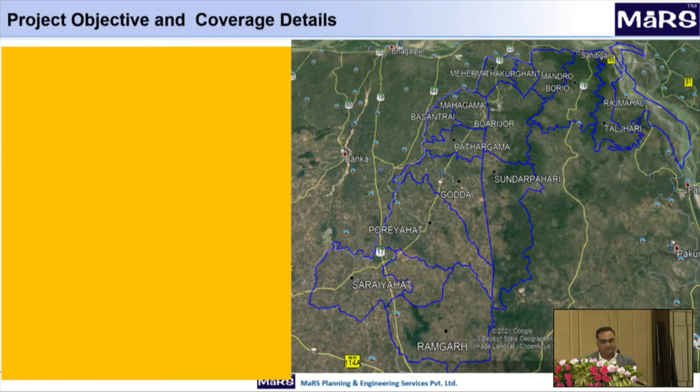The objective of the project is to provide 100% sustainable drinking water pipes for water supply within 9 blocks of Godda. We will be covering the whole Godda district, 3 blocks of Sahibganj, and 2 blocks of Dumka using river Ganga as a source at Rajmahal.

The present water supply is intermittent and unreliable, and it is using groundwater, and most of the households are using dug wells, hand pumps, which is not reliable. So this project was formulated to address these gaps in the water infrastructure in a holistic and integrated manner. And the main objective of the Drinking Water and Sanitation Division is to improve the water supply efficiency and have a positive impact on the public health and environment.

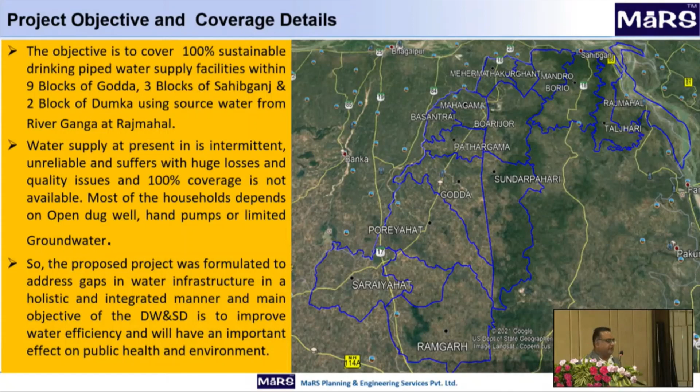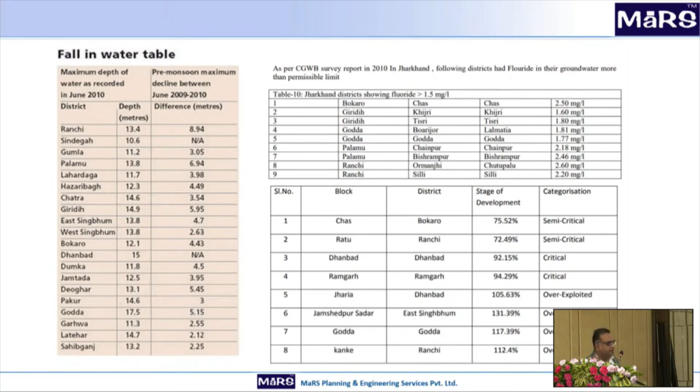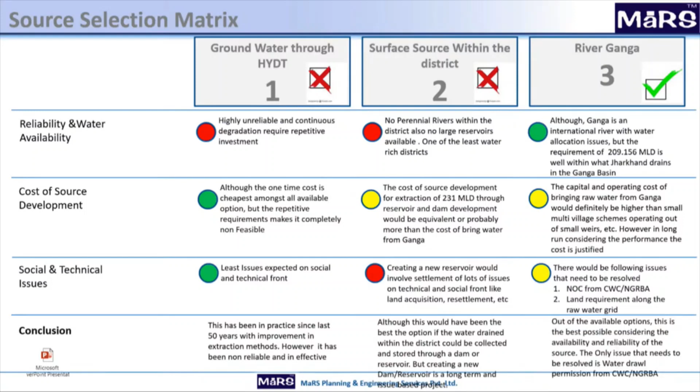So this is the selection matrix. Groundwater was highly unreliable, and there are no perennial rivers. And although individual wells and dug wells would have been cheapest, it's not a viable option. And also the cost of source development for extraction of around 231 MLD through reservoir and dam would have been

very costly. And there are other social and technical issues for the groundwater and creating new reservoirs. Hence, Ganga was a viable source and a sustainable source for water supply, which we have selected as a source for this mega water supply scheme.

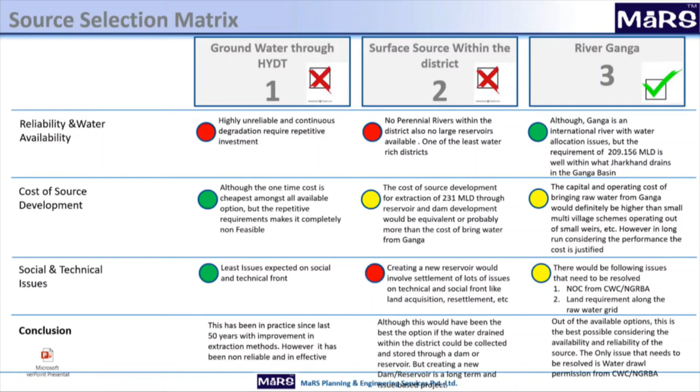We are covering 14 blocks, totaling 271 panchayats. We are covering 3,264 villages and about 3.32 lakh households. This covers almost 6% of the state population, and an area of around 5% of the state, which is around 5,000 square kilometers.

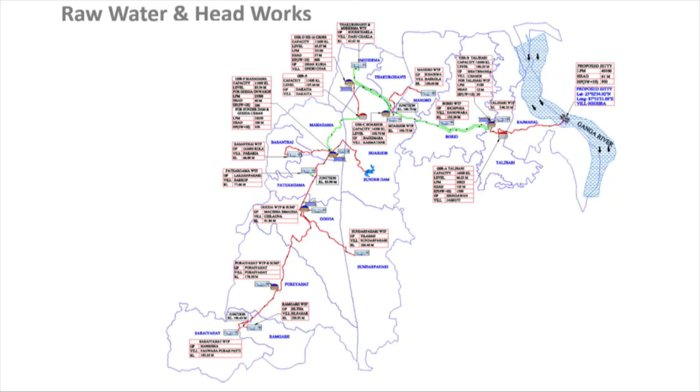So this will flow all the way to Meherma, and from there there's another intermittent pumping, and then ultimately the water is coming to Godda district in Mahagama reservoir. And after that it is all pumping till the downstream sources, till Ramgarh and Saraiyahat. Next.

The scope of work covers construction of a floating jetty at Rajmahal. The raw water transmission main length is 87 kilometers. The pipe diameters are from 1100 to 1800 mm. There are 13 WTPs provided at different locations. There are 6 main GLSRs. There is 1 ESR at each panchayat, a total of 271 elevated service reservoirs.

The clear water rising main length is around 1200 kilometers. The entire distribution network for this project is around 5,500 kilometers. There are 14 electrical substations, and we are going to provide around 3.32 lakh house connections.

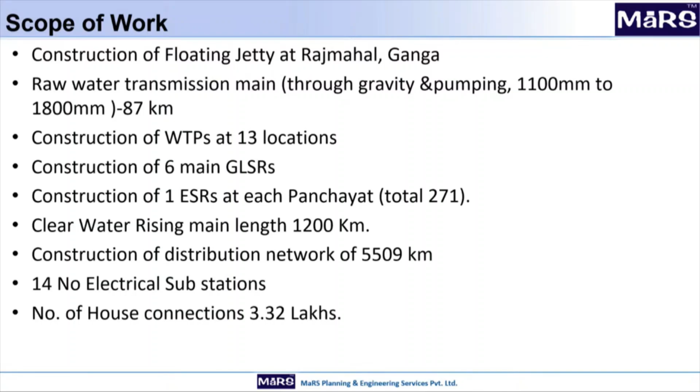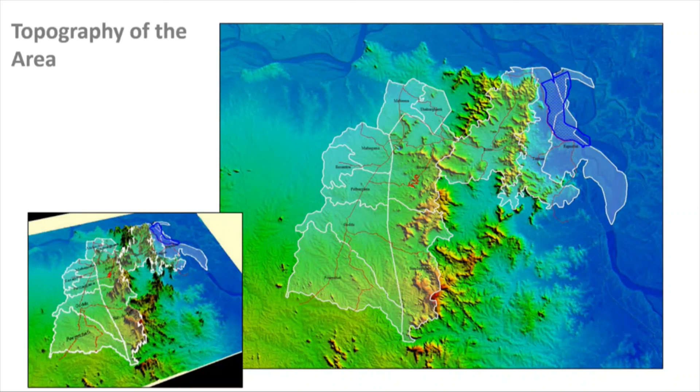Next. This is the topography of the area. The topography is highly challenging. There are undulations at several places, and that is why from Rajmahal, we had to pump water to the Rajmahal hill, which is at an elevation of 190 meters. From there, it flows by gravity downstream, and there's intermittent hilly terrain, as you can see. Because of that, we have intermittent pumping at several locations.

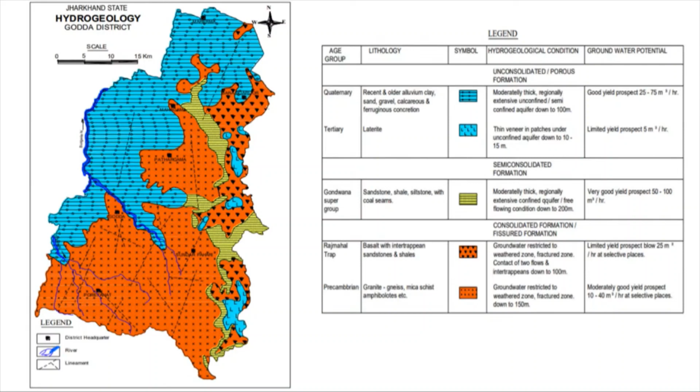Just a minute, Mike.

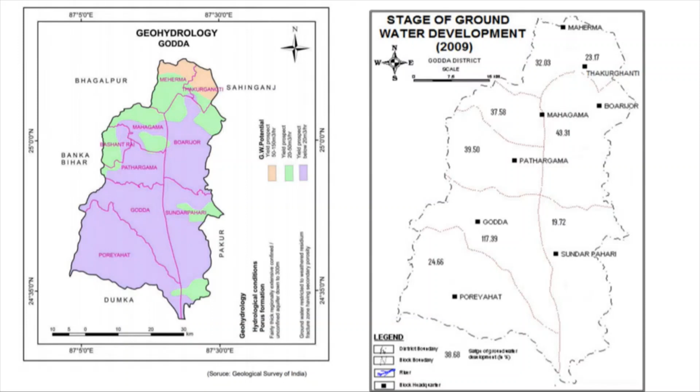So, as you can see here, the yield is around 50 to 150 cubic meter per hour in the orange colored region, and in the southern part till Poreyahat at the downstream end, it is below 20 cubic meter per hour. So groundwater was not a sustainable source.

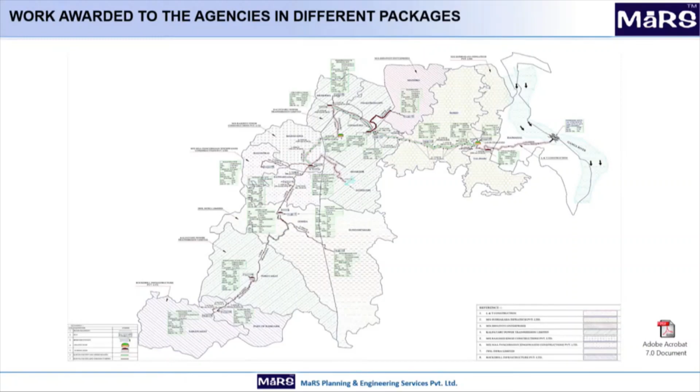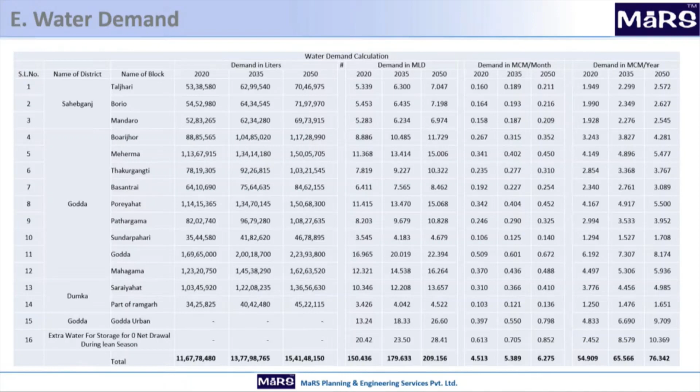So for the project, these are the different activities performed. During the pre-construction stage, there was DPR preparation, then technical sanctions had to be taken, then the bid process was followed. Then we assisted in award of work to agencies and liaising with other departments for paperwork, and put necessary quality assurance, quality control systems in place before the start of execution.

During construction, we are ensuring that the work is carried out as per technical specification and tender drawings, and we are ensuring water quality and work quality are as per the specifications and drawings. We are carrying out material inspection as per QAP and standard QAPs. Then we are monitoring the progress of the project in time, cost, and quality, assisting with the measurement of work and verification, scrutiny of the bills, and regular reporting of the progress.

Also assisting in audits, VIP visits, legal issues, any conflict resolution, and then post-construction, we will ensure that the delivery is as per the plans, as in timing, and also in giving water supply connections to consumers. Then pre-commissioning, commissioning, and tests, making periodic site visits to ensure that work agreed is completed by the contractor. And at the end of the defects correction period, when all outstanding works are completed and all repairs are carried out satisfactorily, to issue the defects correction certificate in accordance with the contract.

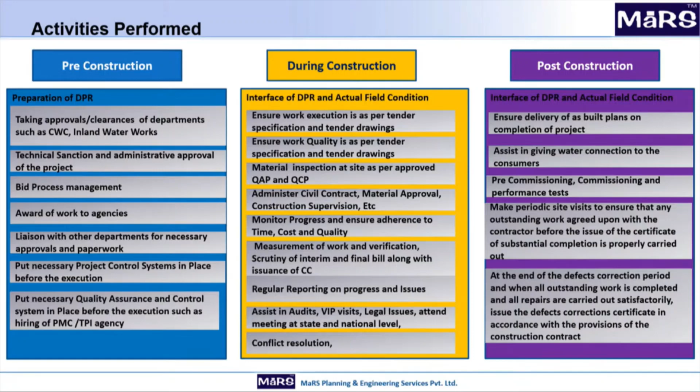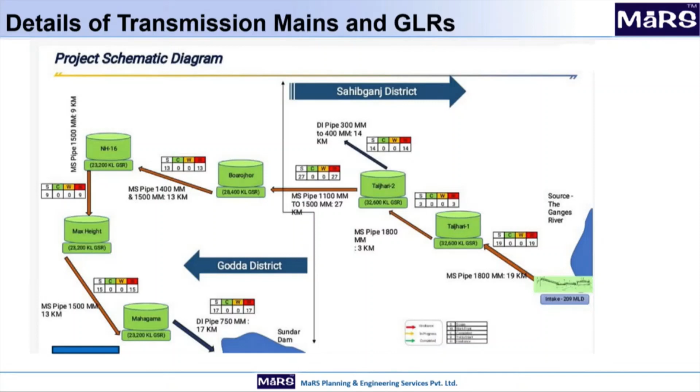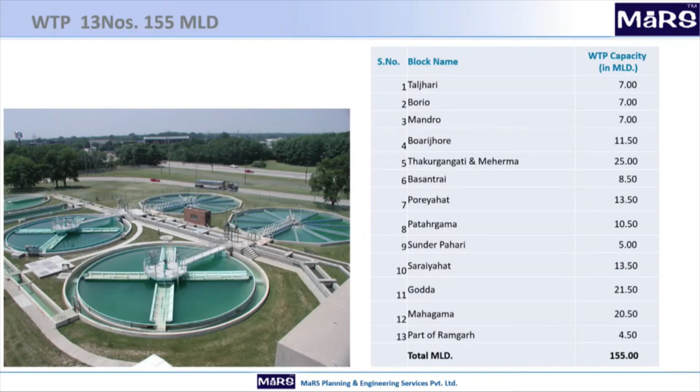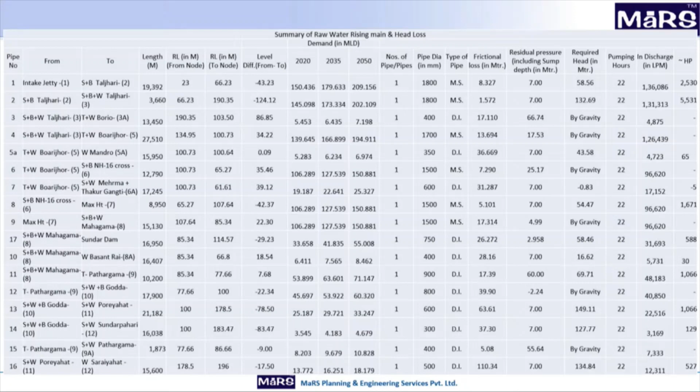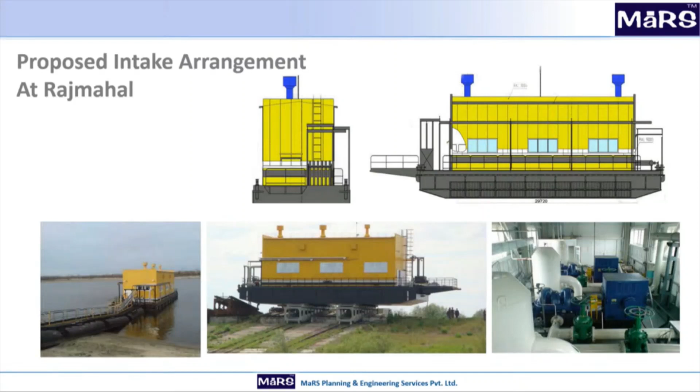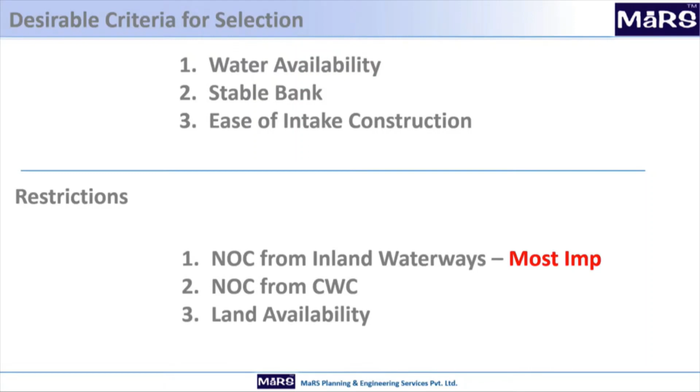These are the 2 floating jetties that we will be having at the intake location. Here, because the river Ganga is also used for navigation by inland waterways, a permanent intake was not feasible at this location, and we could not obtain any permissions for a permanent intake. That is why this floating type of jetty was selected. NOC from Inland Waterways was taken for this, also NOC from Central Water Commission and land availability.

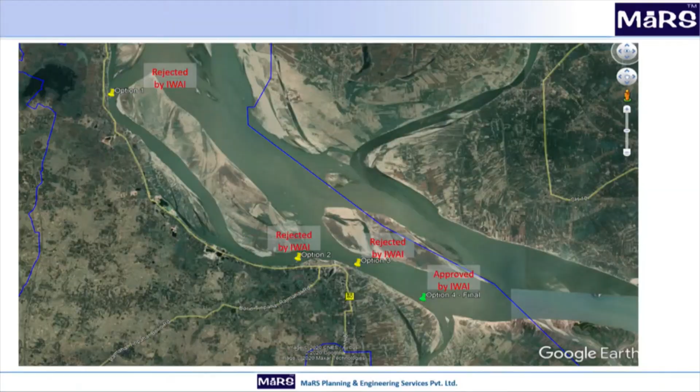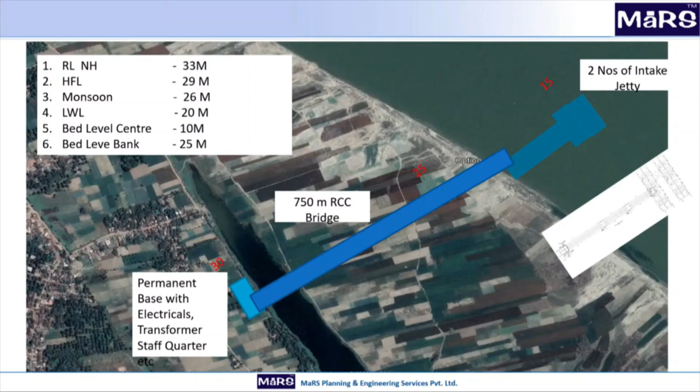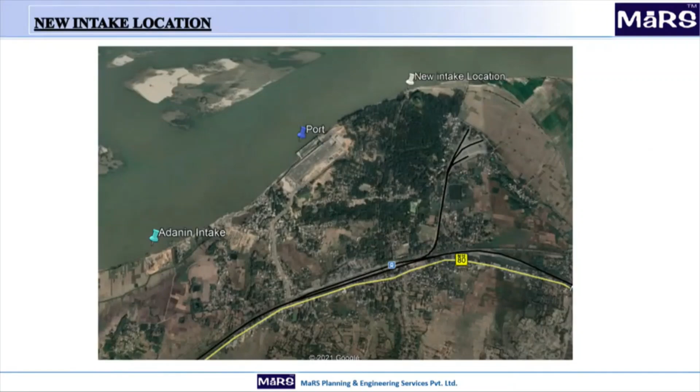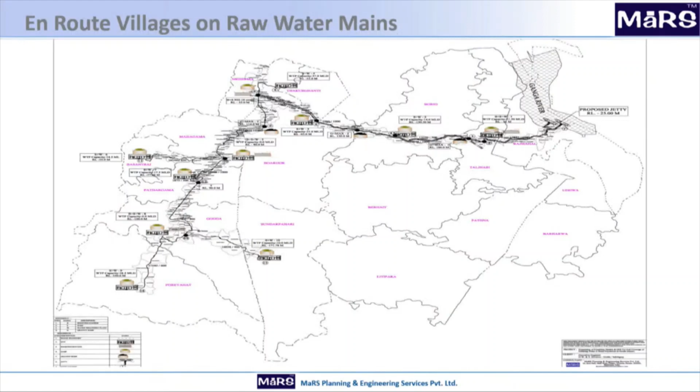Okay, this is showing that earlier one of the plans was to have it near the Adani port, and several options were studied for locating the intake. And finally, the green one shows the location where it is finally approved. Okay. These are the drawings for the floating jetty. Next. The bridge. These are the different villages through which this 87 kilometer transmission main will pass.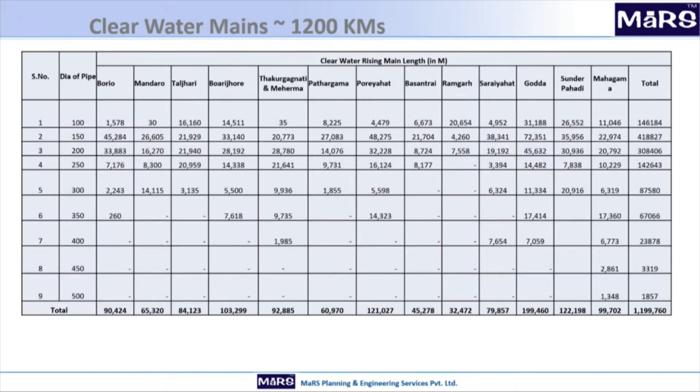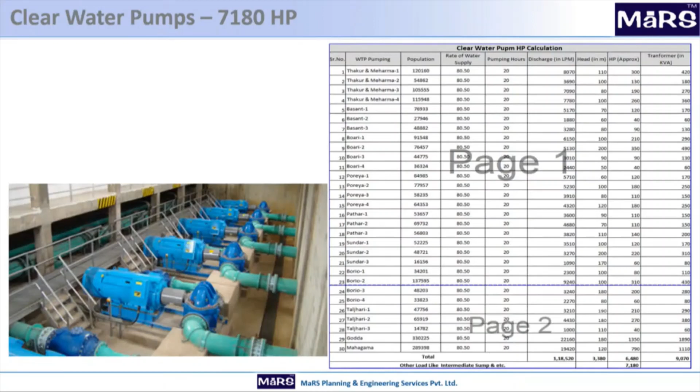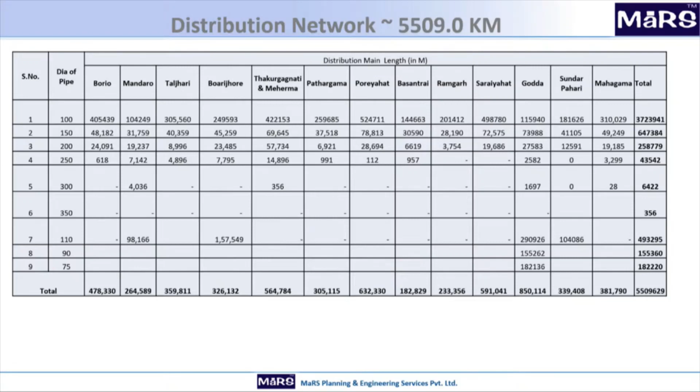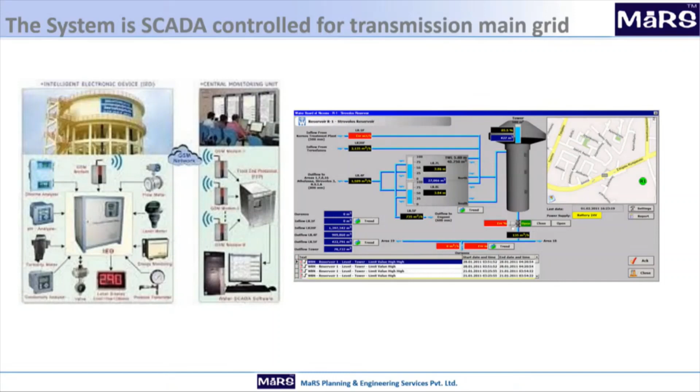These are the details of the clear water mains, around 1200 kilometers for each block. These are all the major capacities of the pumping stations and the pumps. So 271 OHRs will be located, 1 at each panchayat. This is the block-wise detail of the distribution network. Around 5,500 kilometers of network is designed and planned to be laid. This system will be SCADA controlled for the major part, the transmission main. All the 6 GLRs and the transmission main will have SCADA controlled monitoring.

Thank you. What is the time frame you have fixed for this total construction project? Have you fixed some time frame for it? And what is your progress rate? 30 months is the time frame. The work was awarded in March of 2022, and it will run till 2025. And are you adhering to your progress, percentage-wise, as per your target? Around 35 to 40% is the progress. The work is awarded and its execution is being carried out at site.